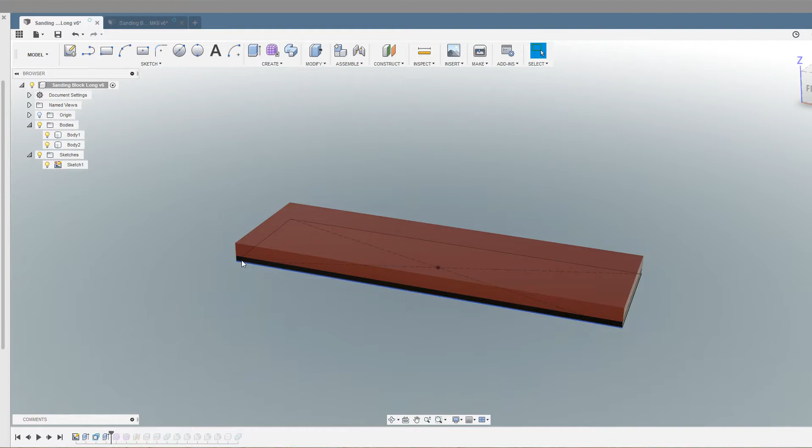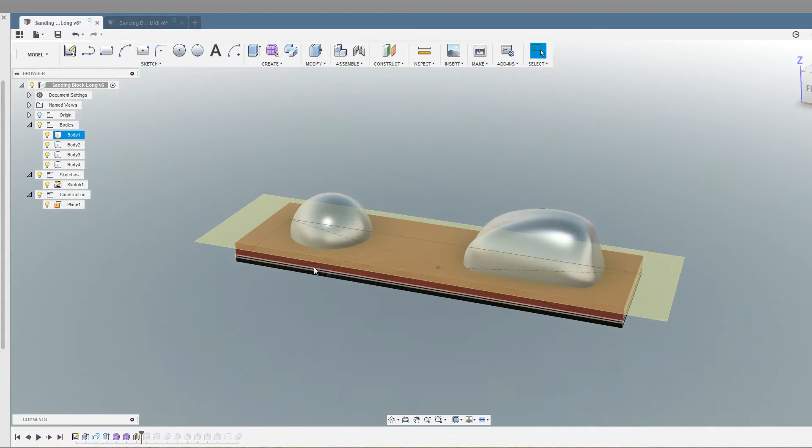Then what I've done is I've actually created a couple of more organic shapes, shall we say. This one's going to be at the back of the sanding block, and this one at the front, which is just a sphere to start with. And these are created using the Sculpt workspace in Fusion 360. Very easy to do. Then I've created a construction plane on this top surface, and we're going to slice that sphere in half, and we can get rid of the bottom bit. And then we're just going to slice this one as well, and also get rid of the bottom part, so that we're essentially flush, if you like, with the block underneath it.

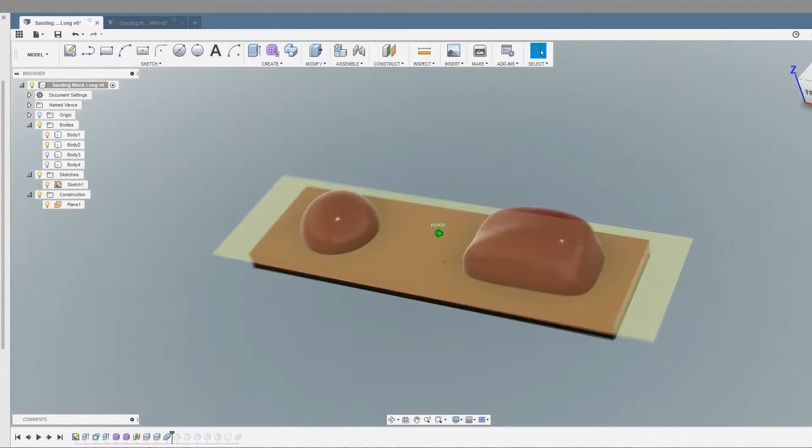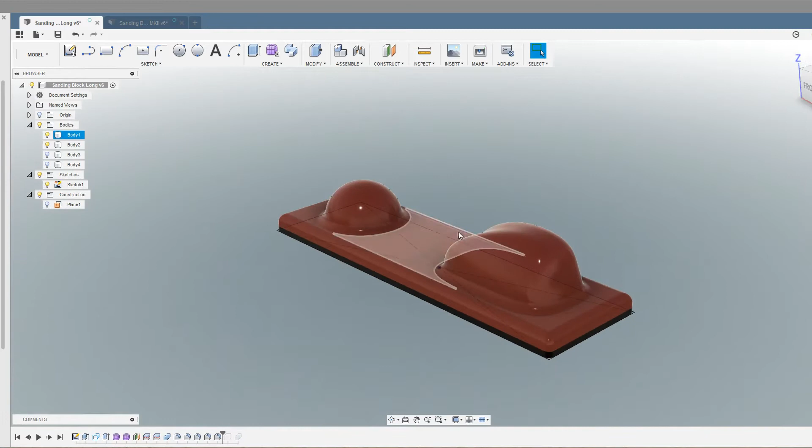Then we're going to combine that into one body, and really all there is to it then is just to put some fillets around the corners and edges, also a fillet around the join for the organic shapes and the base, just to smooth that out a little bit. And that's it. So there's our first one. It's almost like a plane, I guess, but a sander. We just wrap the sandpaper around the sides.

Okay, the second type's going to be a little bit different, because I then saw on Amazon that there were some sanding blocks where you kind of clamp the sandpaper into the block itself, and I also needed a smaller version of the one we've just looked at creating. And I thought, well, £15 I think was what they were charging for this. It's a little expensive, so I'll see if I can create one myself. So here we go again.

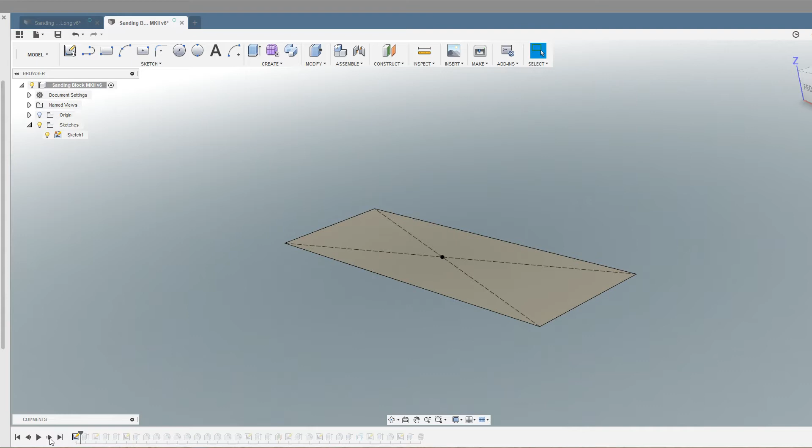And first thing we do is again create a sketch for the base, the right size of the block we want, extrude that out, and I've created a sketch on the end here, and you can see there's a couple of shapes here, and we extrude those through, one to this shape here just to cut through the base, and that'll create the first part of this, and then extruded the piece which will sit on top of that, and the sandpaper will kind of clamp in this gap here.

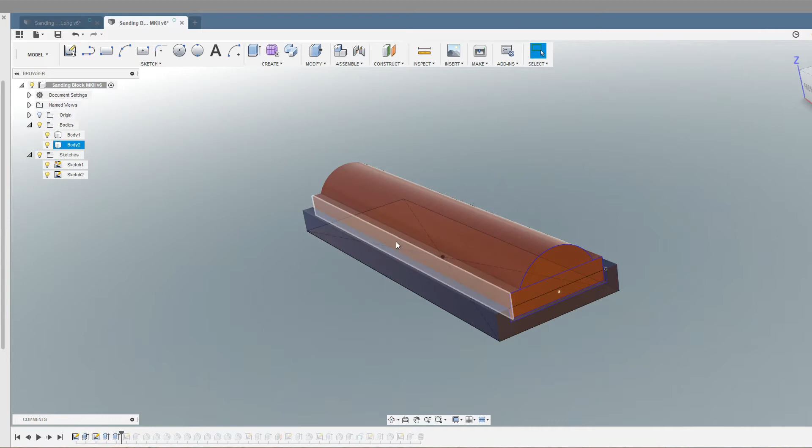Then we create another sketch from the side. We can then chop away all this material. Then we come in with a bunch of fillet operations, just basically to round all these edges off. We don't want any sharp edges when you're sanding, otherwise you'll end up with no palms left. So there we go, nice rounded shapes all round.

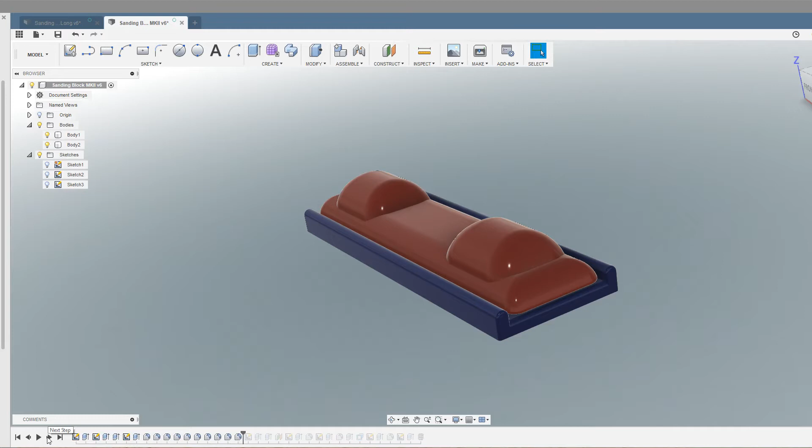Then we're going to create a sketch on the bottom of our first block here, and we're going to put a couple of holes through, and then with a couple of countersinks. What we'll do is we'll put 6mm bolts through the bottom here, and we'll probably just epoxy those in place. That'll be fine for what we need them for.

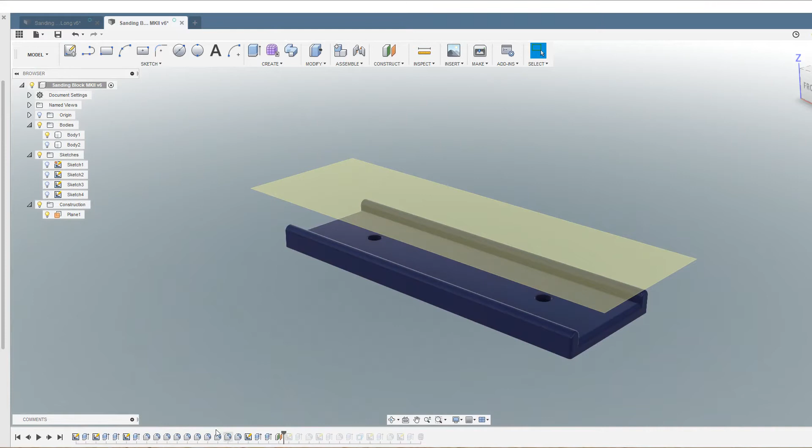Then we're creating a construction plane on the top. Let me just switch this sketch off there and create a couple of shapes. Let me just turn the top body on, because what we want to do is extrude down into these kind of rounded dome shape things here. Fillet the edges of those so they're nice and smooth, and we've put a hole all the way through as well.

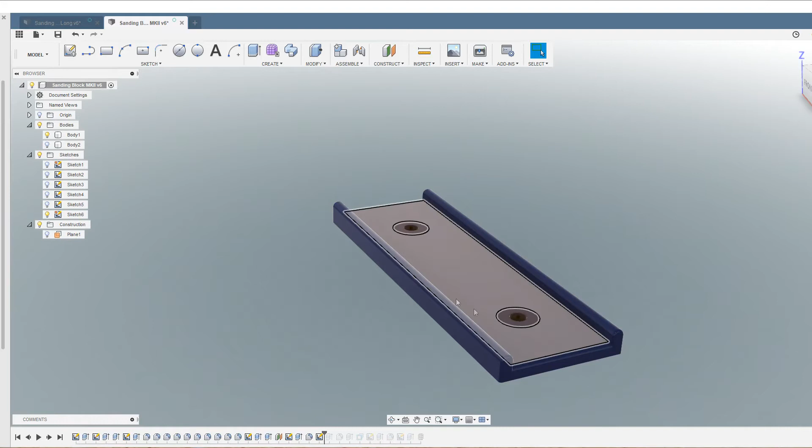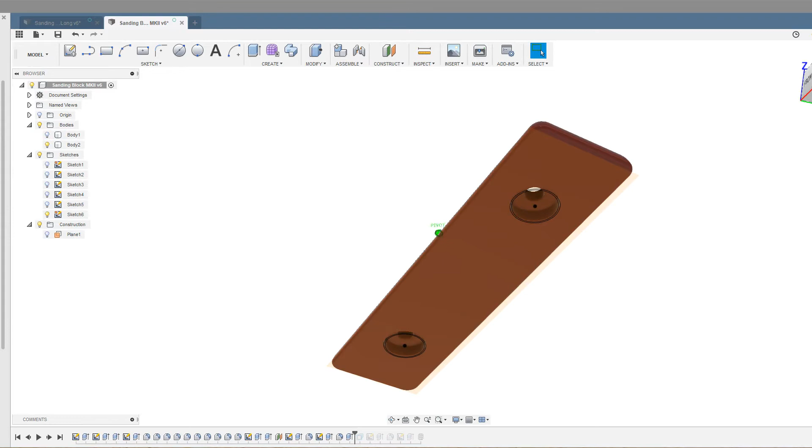Then we're going to create a sketch on the top of this first block, and we're just going to extrude these lugs out here. You can see I've put two concentric circles in here, so one will be the inner piece, which will then locate, and just fillet those first, and then we can extrude cut the outer piece into the top here. See these recesses in there, and that'll essentially locate the two parts together. And because this wasn't quite deep enough, I actually extruded it down a bit further, made it a bit thicker.

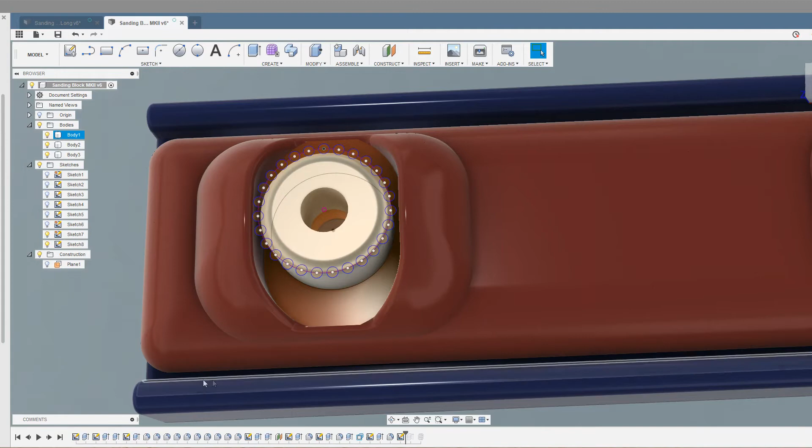Then we create a sketch on the top here, extrude that up, fillet it, create a sketch on the top, on the sketch we create one circle, and then we use the sketch circular pattern to essentially create a whole bunch of others. We could use the pattern command as well within the modify thing. Both methods work. Then we can extrude those circles down, which makes a nice grip on the outside of this, what will be a thumb screw essentially, to screw the two halves together and hold them in place.

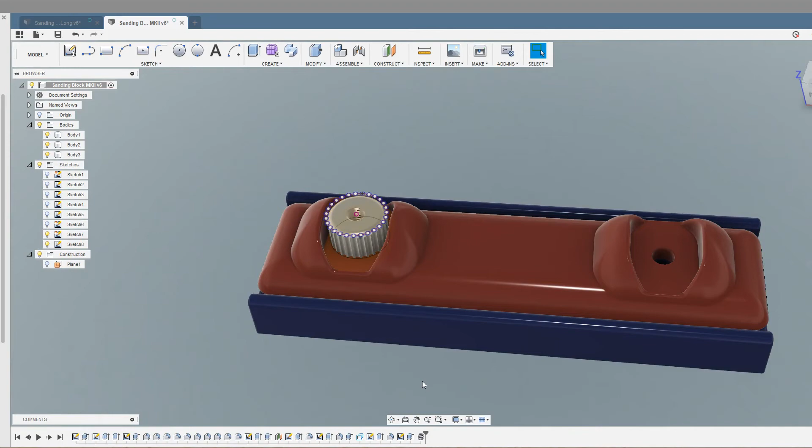And then all we need to do is put some M6 threads on the inside of this, and then we can just take this object and we can just print two of them to make two there. So there we go. Let's head over to the printer and get all this lot printed out.

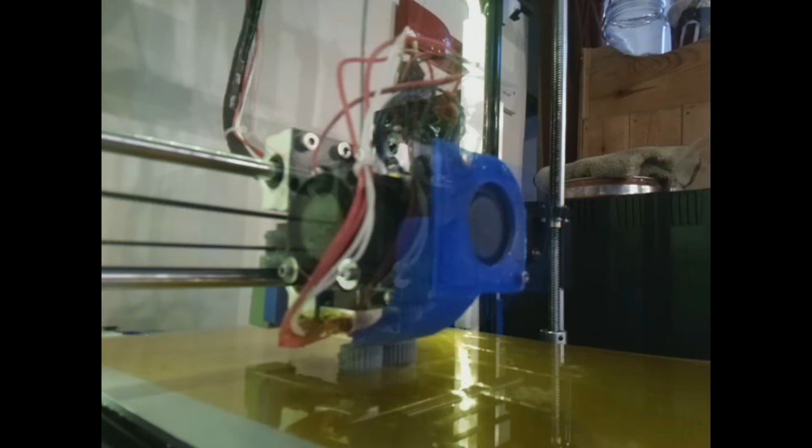Okay, over to the 3D printer, and just a couple of things. So we've put an 8mm brim around this shape just to try and hold it on the bed. Just peeled up a tiny amount at the front edge there, you can see, but that doesn't matter, as you'll see in a second. And over to the second block, print the bottom piece. That's fairly easy shape, so is the top for that matter. You'll notice I'm using about 20% infill there, and a 2 or 3mm thickness of walls. Then it's over to the two nuts. They don't take very long to do at all.

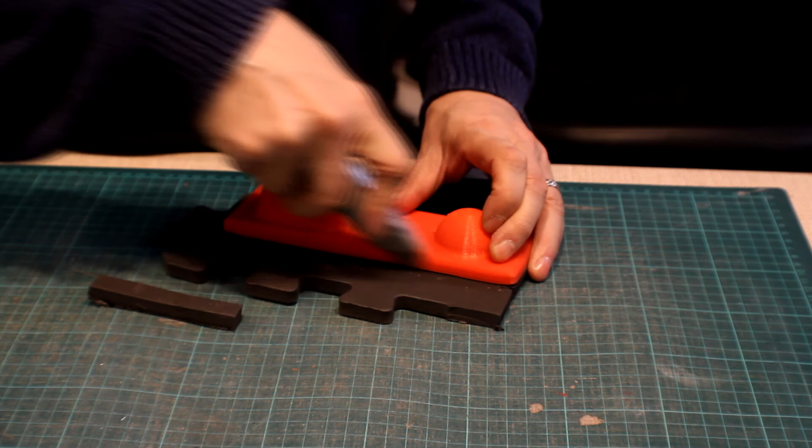Then over to the bench with a bit of super glue and a bit of urethane foam, which is just some off-cut floor matting. Hold that on there till it's set, and then getting hold of a sharp knife, we'll just trim around the edges. And unfortunately with that foam, it doesn't stay sharp very long. You'll notice there's a couple of frayed edges, and you need to just nick those off there.

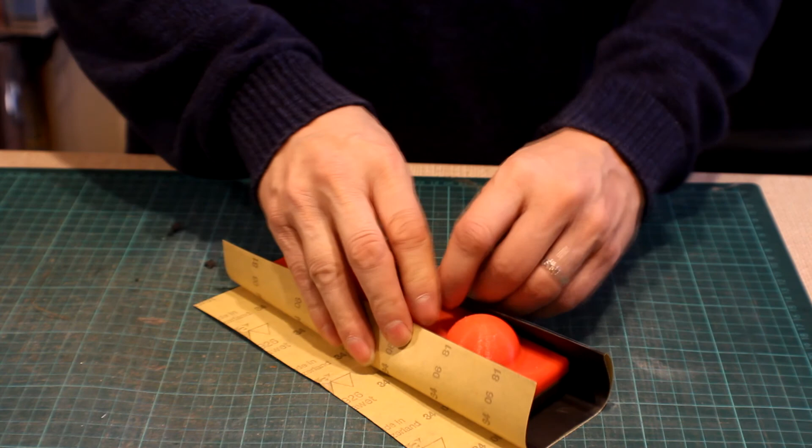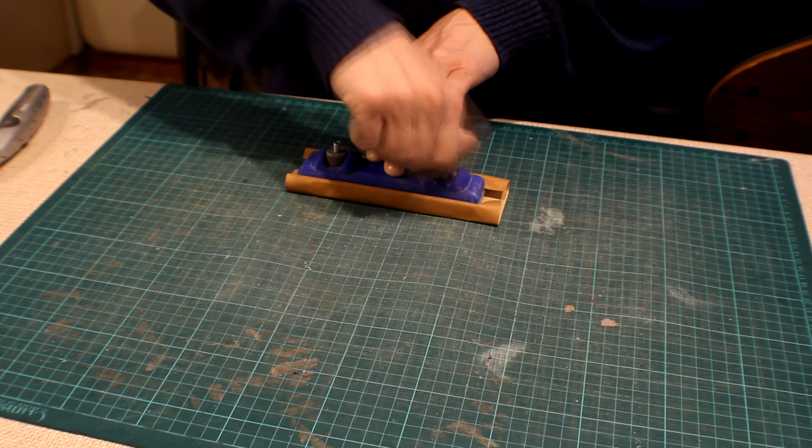Look. But that's fine, just to use as a standard block, and the foam on the bottom means that it's not going to be so harsh on the thing that you're sanding. Great for doing things like guitar bodies. The other one is really just clamp the sandpaper in between the two halves, screw down the nuts onto the two bolts, which are just epoxied into the bottom of the bottom piece, and we're ready and done. So there's some sanding blocks.